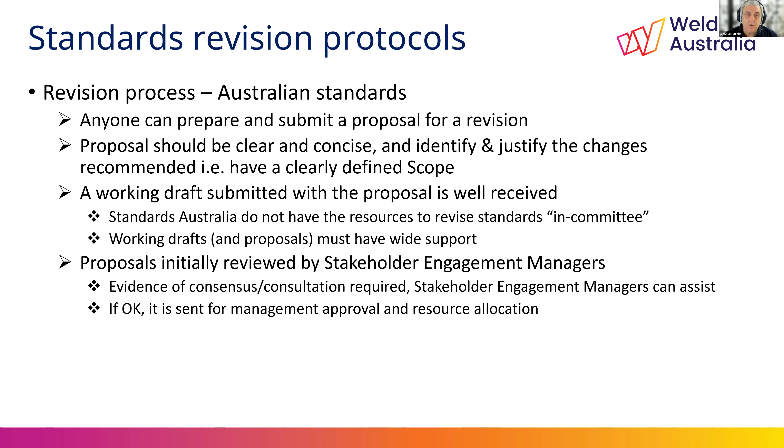Now, proposals lacking support or with minimal detail on changes required will either be rejected or returned to the proposer to seek wider consultation and review. Now, once a proposal is accepted by Standards Australia, a kick-off meeting must be held, usually within 6 months.

And the committee typically has around 8 to 9 months to complete the initial drafting process in preparation for the submission of the draft to Standards Australia editors for preparation for public comment. Now, for this reason, well-prepared working drafts are favourably received during the project proposal stage. Back in the old days, the chair of the committee would ask members what changes they wanted to see in a standard and proceed from there to redraft the text. Very slow and ineffective use of everybody's time.

As I've said previously, Standards Australia just don't have the resources nor the time to revise standards in committee, and it's very, very inefficient. By way of comparison, revising a standard in committee, as was the traditional process, typically took 2 years just to prepare the initial draft. And one standard actually took 10 years to revise. So it has been made abundantly clear that such long time frames are an aberration of the past and cannot be tolerated. If a revision is not completed in a timely manner, it runs the risk of being cancelled.

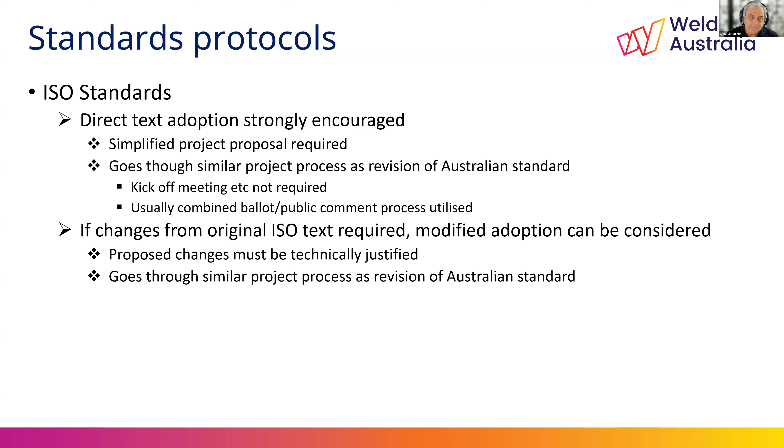Now, the ISO protocols and methodology are similar to those of Standards Australia, except that ISO can give a drafting committee up to 3 years to complete a project. This said, should the ISO drafting committee run out of time to complete a project, the committee can cancel the project and raise a new work item to resume the drafting process. Resetting the ISO drafting clock is important for complex projects. For example, the revision of the current ISO 9606 to combine all 5 parts.

A key point that must be mentioned is that as it is the Australian federal government's policy to adopt ISO standards where technically feasible, it is imperative that Australian committees review and, where appropriate, comment on the relevant ISO drafts. Our mirror committees do have access to all the relevant drafts, and I cannot underscore enough the importance of reviewing all draft standards, including ISO drafts. Too many countries just vote positive without reviewing the contents.

If it's important to Australia, it is also imperative to physically attend ISO meetings so that Australia's views can be considered. Whilst ISO have had teleconferencing facilities available for some years, in practice until COVID hit everybody, it was often difficult to access. ISO meetings now occur regularly via Zoom, but are typically limited to 3 or 4 hours duration and start at 1 p.m. CET in Europe. This usually corresponds with 9 p.m. Sydney time during our winter, or 11 p.m. during our daylight savings time, and 7 a.m. on the east coast of the USA.

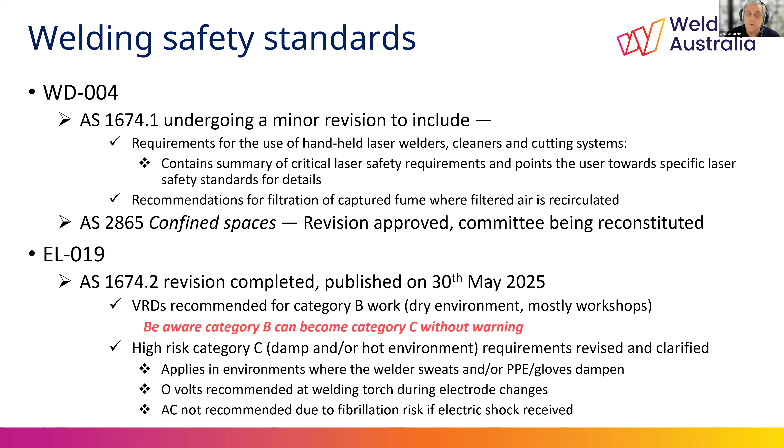Now, there's been a lot of recent activity by the various safety committees responsible for personal protective equipment, and I'll spend a little bit of time going through this. Now, Committee SF6 are currently moving to replace the AS 1338 series with modified adoptions of the ISO 16321 series. These standards cover welders' eye filters and protective visors. Note that the adoption of these ISO provisions has been long envisaged by the drafting committee, and the revised drafts have been balloted by this drafting committee and are now being prepared for publication. I don't have a date.

SF53 covers personal protective equipment not covered by other committees, including welders' protective clothing. Now, AS/NZS ISO 11611 was published in March last year and specifies requirements for the fire resistance and electrical resistivity of the clothing. And the latest edition now includes ultraviolet protection for the wearer for both light duty and heavier duty welding and related applications. Now, the last committee I'm going to just talk about is SF10.

They have adopted a range of ISO standards to replace our AS/NZS 1715 and 1716 standards. The existing Australian standards will remain in use until 2030, and in the meantime, the adopted ISO standards will gradually be implemented as these standards are phased out. Now, Standards Australia ran a webinar covering this change last year on the 2nd of May 2025. Now, I'm going to deviate from this presentation slightly, and in the next 2 slides, we'll give you, hopefully in layman's terms, a quick overview of how the changes relating to weld fume protection with the impending superseding of the 1716 in particular will apply.

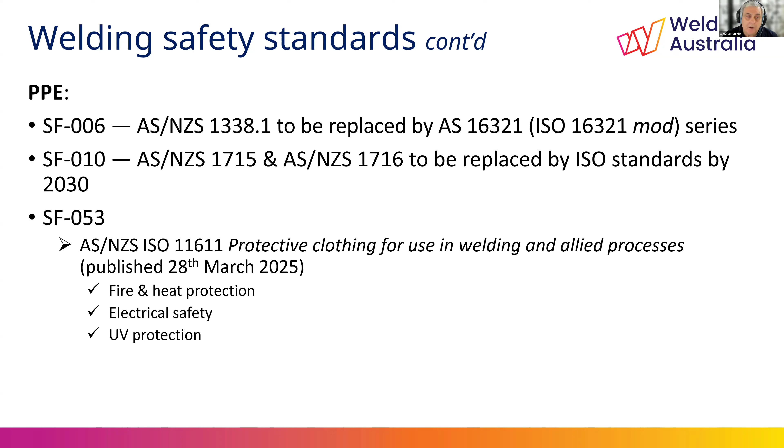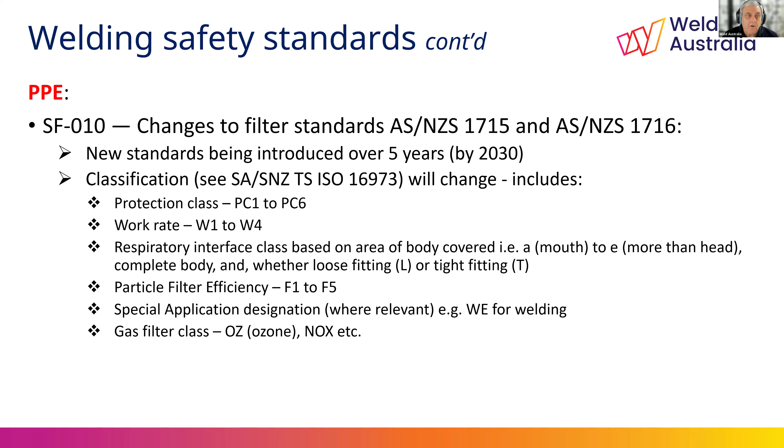Now, the Standards Committee advised that the aged standards are being progressively superseded by a range of standards over the period 2025 to 2030. Now, these standards are all ISO based and cover the same ground that the existing aged Australian standards covered, but they're all updated. Of importance to users, the classification of filters that are available will expand to include the 6 factors shown on this slide. Now, users should note that the standards require manufacturers to test the actual performance of each type of system they sell. This is where things have changed. Unfortunately, whilst there's only 2 testing laboratories able to conduct these tests, it will be some time before users will see product compliant with these new standards being released to market. Now, I'll give you an example of how the process works.

Now, looking at the common P2 filter, which I'm sure everybody is familiar with, it's used by welders, and it's now similar to protection that's provided by what's called the F2 class. Now, for those of you who aren't familiar with this particular P2 filter, it's the same filter that was recommended during the COVID period. Now, an example designation suitable for welding would be a bit of gobbledygook for you: PC2,

W1, bT, F2, WE. Now, if the filter is capable of filtering ozone, it will also include the designation OZ1, as I have shown. Now, you can see how under each of these particular items they apply. Protection class is PC2. That relates to how much potential leakage there may be in the device. There's work rates between 1 and 4. Now, a face mask will probably only be a W1, which is moderate or light work, where you're not breathing

heavily. Then you've got your respiratory interface, so T for tight fitting. A is mouth, B covers your mouth and nose, and it goes all the way up to E, which includes a full body suit. Particle filtration efficiency, F2, which is better than 95%. F3, from the P3 from memory, is 99.7%, and it goes right up into the HEPA range, the F classes. And for application, specifically for welding, it's a WE, and as I mentioned, for ozone, it's OZ1, and it's relevant to the work rate in that particular situation.

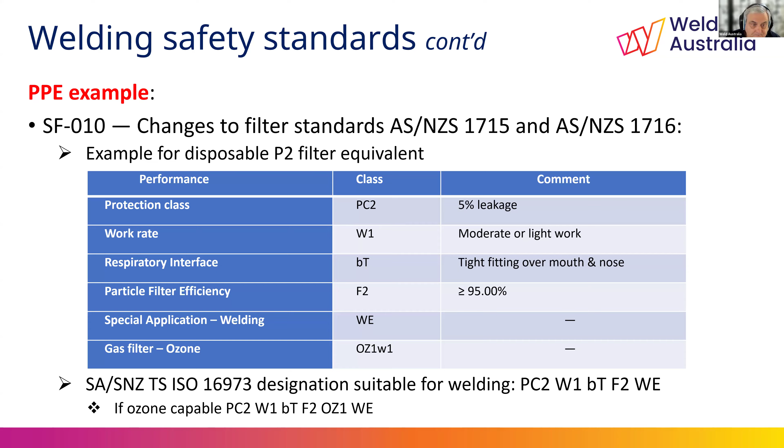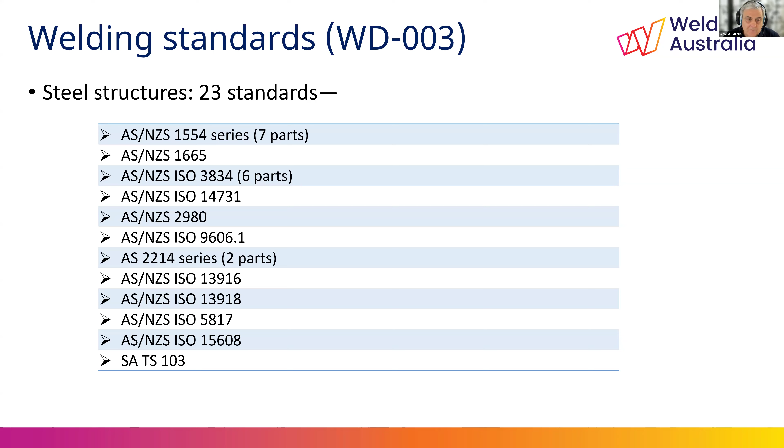Now, looking at some of the other welding standards. These are the main standards WD3 is responsible for. You will note that many of these have an ISO basis, although it is not always immediately obvious that an AS standard has its origin in an ISO document. Where relevant, affected standards will usually indicate that they have taken recognition of the relevant ISO standard or standards in the preface.

Now that the definition of welding inspectors has been resolved, and that was a big hold-up for the 1554 series, the actual revision of this series is scheduled to commence once the revision of AS 1665 gets to the public review stage. This said, I can advise that the revision process for AS/NZS 1665 is well advanced and the initial drafting is scheduled for completion by the fourth quarter of this year. Under consideration is provision to address the inclusion of laser welding and additive manufacturing in 1665.

Now, with AS 2214, you will note that the standard has been retitled and split into two parts at this point in time, with other parts to follow. This change provides for better integration with AS/NZS 5131 and defines recommended technical knowledge and competencies for relevant supervisors and now inspectors. Part 1 of 2214 aligns with the 1796 certificates 10 and 11, and from a structural perspective, Part 2 is specific to bolting. Both parts were published in December 2024.

Whilst Weld Australia has received inquiries regarding training to Part 2, we are referring inquiries to the Australian Steel Institute, who have developed a training course. The drafting of bolting theory components of the course has been completed and a practical jig is actually being manufactured by the ASI. A number of specifiers, including Austroads, are moving to mandate qualifications to Part 2 for bolting applications as soon as people do become qualified.

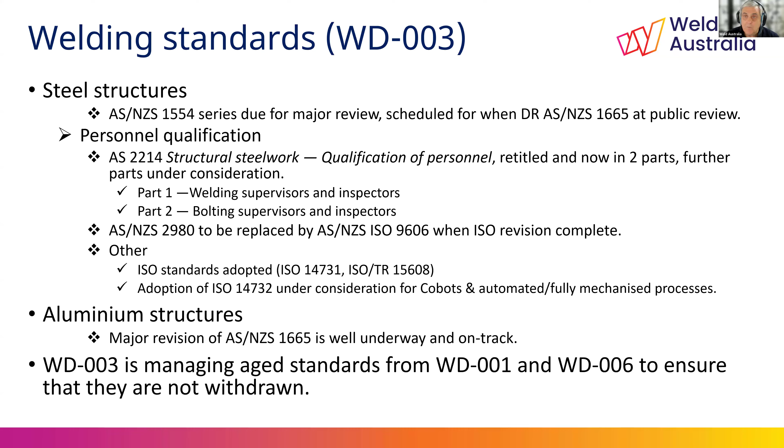So no decision has been made at this stage as far as the New Zealanders are concerned, but the decision will be made in consultation with New Zealand on that point. We may in fact have to. An option may be to run 9606 as a modified adoption to include that in, but I don't know. Okay, thanks, Bruce. All right, moving forward.

Now, back in 2022, Weld Australia identified some issues relating to 1674 Part 1 on fire precautions and linked to this AS 2812, particularly around the definition of hot work and flame brazing. So 2812 was duly revised and republished in June 2024. But just recently, Standards Australia advised that due to a publication error, a number of diagrams in that standard were missing, and this has now been fixed.

Now, regarding AS 1101 Part 3, which is the drawing standard, Standards Australia have been aware for quite a while of some minor errors within that standard. That covers graphical symbols for general engineering, Part 3, welding and non-destructive examination. Unfortunately, due to resource limitations, these errors were unable to be immediately addressed. However, I can report that a project kicked off in 2025 to correct these reported errors and at the same time update non-destructive testing terminology from NDE to NDT, consistent with common usage and also ISO usage.

Now, the public comment process has been completed and comments received are being resolved, and a committee ballot draft is now being prepared, which is the next step in the publication process. So in coming months, I would expect a new edition of that standard to come out.

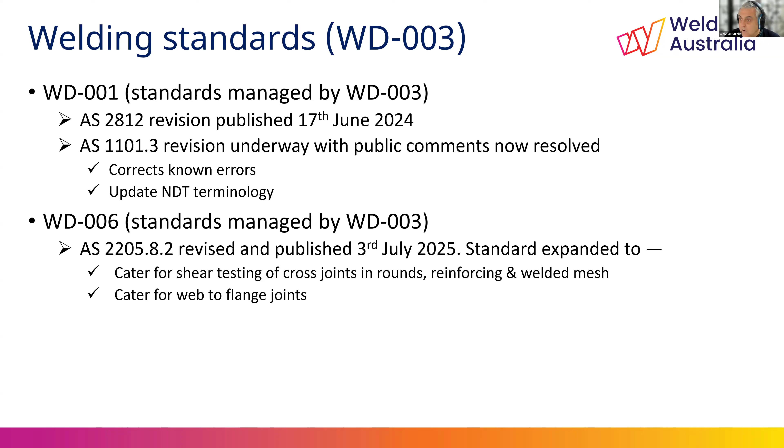Now, just covering the ME1 standards at the moment, which is your pressure equipment. There's currently 25 standards that are active. Now, the standard 3788 covers in-service inspection of pressure equipment. It was revised and published in June 2024, but it has been noted that it does contain some minor errors in the standard, particularly in Table 4.1 and Section 9, requiring an amendment to correct it.

I am also aware that a number of users are asking some very specific questions as to changes in the content of this standard. However, these need to be directed to Standards Australia to ascertain that an error has not been made during the revision process. ME1 are currently revising another standard, AS 4343, which is hazard levels, and AS 3992. Now, public review of both of these standards has been completed and comments received have been resolved, and the drafts are now being prepared for committee ballot.

Now, Weld Australia has also been asked to lead a revision of AS 4458 on manufacturing of pressure equipment, and I can confirm that a working group has held quite a number of meetings over the last 2 years, with the initial drafting process being well advanced. Some issues with material groups have been encountered and identified, and these have been addressed in the revision of AS 3992. Once completed, the draft will be submitted to Standards Australia to be utilised as the basis for a formal revision process, as I've mentioned. So this has actually proved to be a very, very big revision process on this standard.

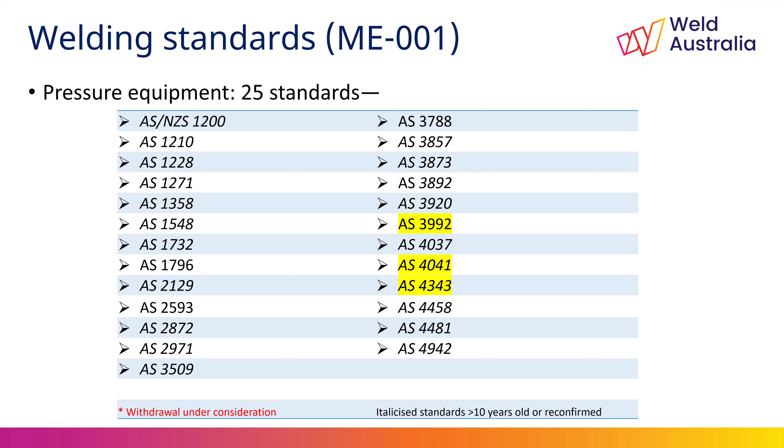Righto. Now, whilst the design standard 4100 underwent a revision in 2020 to remove the fabrication components from the standard and refer to 5131 for all fabrication requirements, it now requires a long awaited major revision. Now, I know that BD1 have been talking about wanting to do this for many, many years. And I've been to many a presentation given by the chair of that committee on this.

Now, the major revision of 4100 is now well underway. And as I'm speaking, the draft is currently open for public comment. So if you go onto the Standards Australia website and go to the public comment portal, you will be able to access it and review the changes. This has actually been a major revision over nearly 2 years, led by 5 expert teams, with the standard being updated to align with current best practice. Of note to fabricators and design engineers, the lamellar tearing provisions within have been revised to clarify some requirements that were seen as too conservative and overly restrictive.

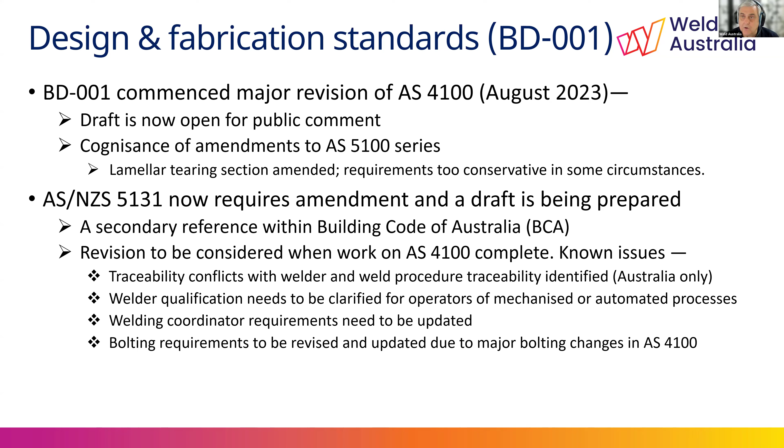While similar to those now published within AS/NZS 5100 Part 6, they have intentionally taken a more informative approach within 4100. Now, associated with the revision of 4100, as I've indicated before, the need to revise 5131 has been flagged, and preparation of a revision project submission is currently underway. That revision will probably be led by Dr. Peter Key from ASI.

Hi, Bruce. So we have another question. Can an ISO 9712 Level 2 person certify the AS NDT standard examination? You probably got me on that point. I really don't know. I take it Level 2s can sign off reports, as can Level 3s, and Level 2s and Level 3s can supervise a Level 1.

We are including some clarification on some of these points within 1665 based on wording that came from MT007 and agreed with the Standards Australia editors. We had to be very careful how we worded that. I hope that it's probably not the answer you're seeking, but it's as best I can answer on that point. Thank you.

And one more. Is it intended that the traceability requirements of AS/NZS 5131 be better explained in the next revision? You betcha. They're a dog's breakfast at the moment, not intentionally, but yes, that is definitely on the hit list.

Thank you. Now, these are the standards on the current screen that MT007, which looks after non-destructive testing, is responsible for or has an interest in. Now in quite a few of these cases, the adoption of ISO standards to replace some of the aged NDT standards has occurred. There are some ISO standards listed that have not been adopted, and they may be considered in the near future.

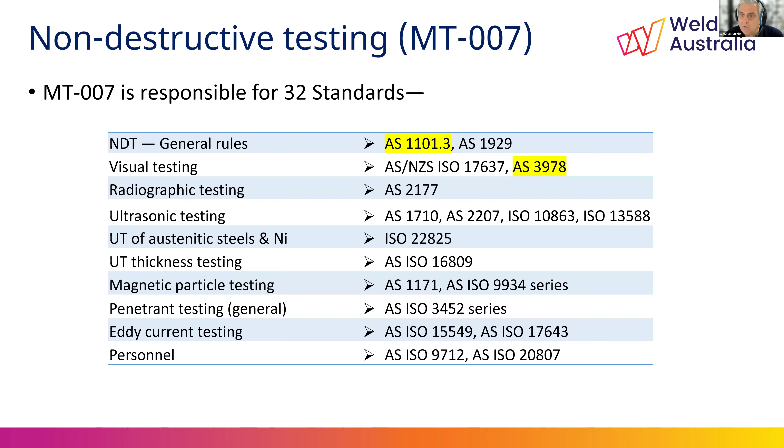To adopt the ISO weld testing standard, which is ISO 4136, a modified adoption of the ISO standard is likely to be required. And as mentioned previously, the shear testing standard was revised to cater for shear testing of bars and welded fabric, and it was published on the 3rd of July last year. Now, that particular standard, 2205 Part 8.2, does include some components from a relevant ISO standard for testing of reinforcing, but we've actually made it broader than just reinforcing.

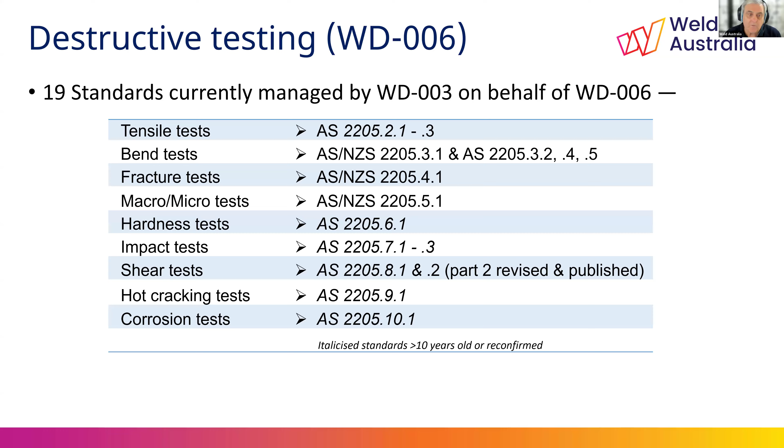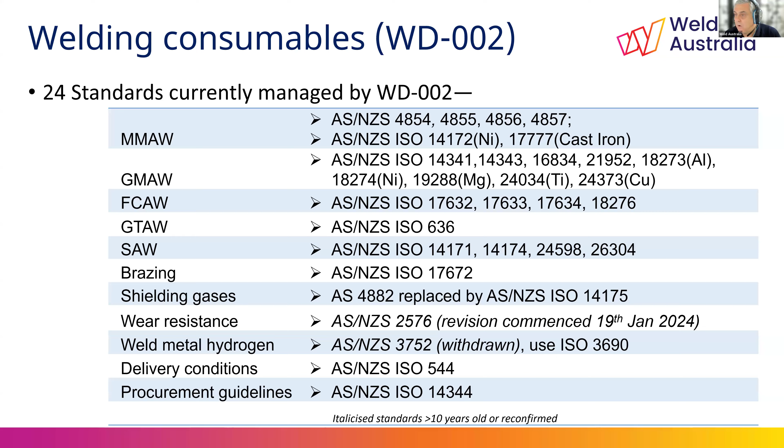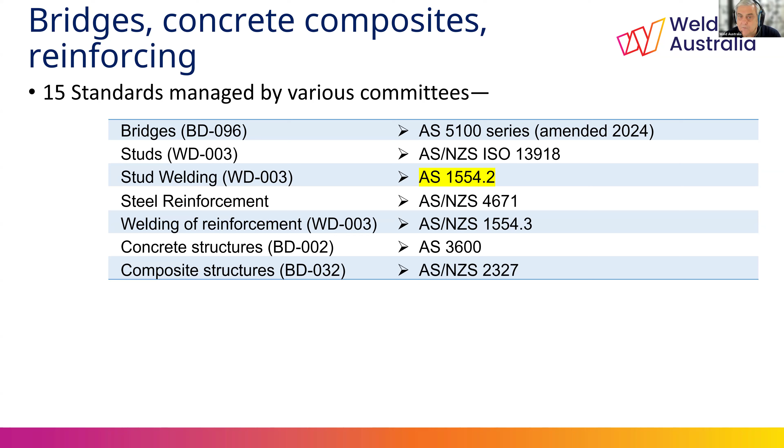Now, AS 4671 now includes reference to two new high-strength reinforcing steel grades, these being 600N and 750N, and at this stage the reinforcing industry has not progressed the need to revise Part 3 of 1554 to consider the welding of these new materials.

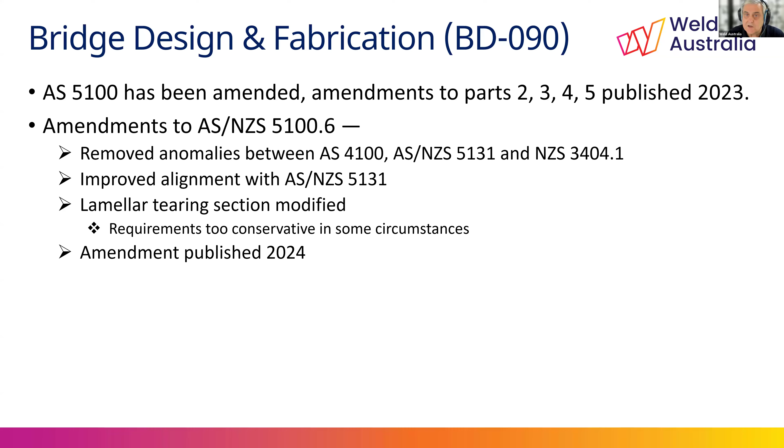The modified provisions are finding their way into other standards, including the current revision of AS 4100, and work to revise and produce a commentary on this standard is now well underway.

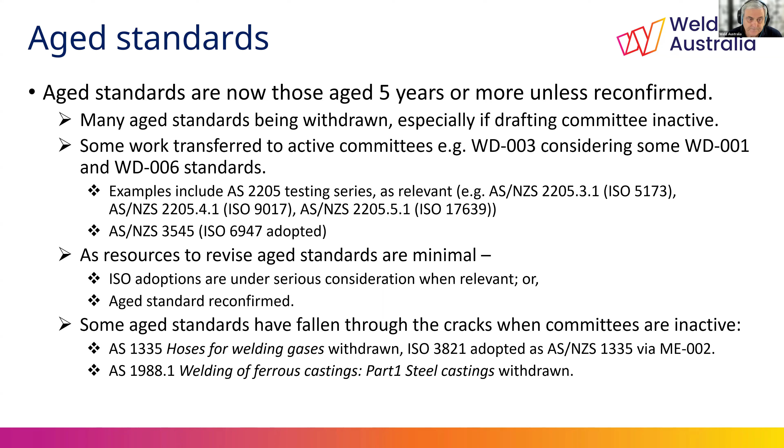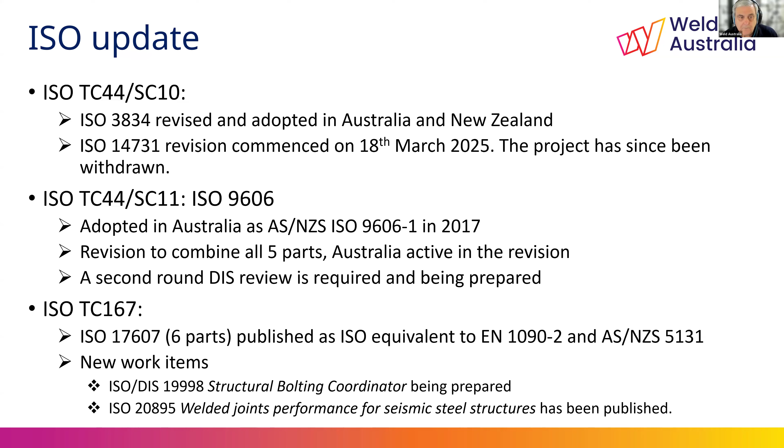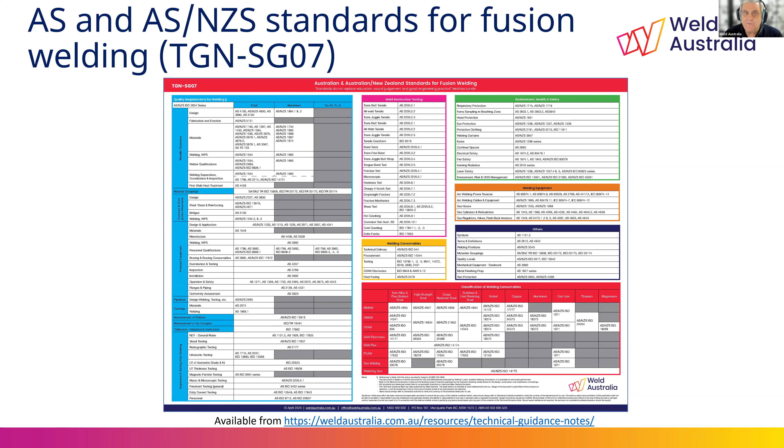And I can say unashamedly that when we drafted the Australian version of this document, we did copy the format, although the content is different.

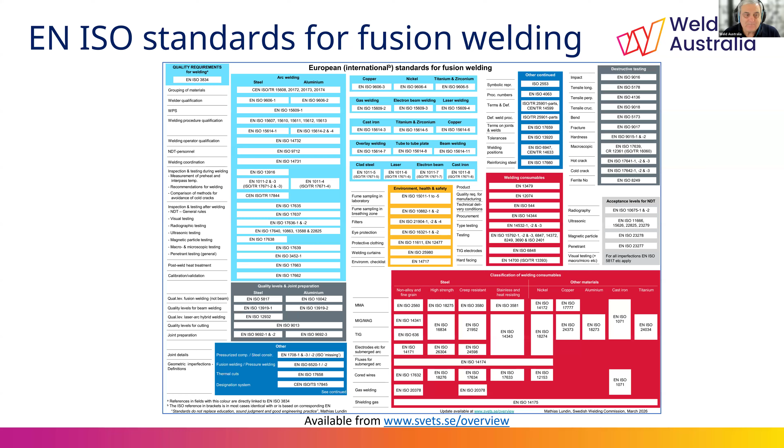Now, just before I finish, I would like to give an overview of standards interpretation requests, because these do come in from time to time and they do cause grief. Before you submit any interpretation request, please read the standard in full. Do not read clauses or paragraphs in isolation. You will simply waste everybody's time, including your own.

Now, you need to submit your question in writing, but there are 3 very specific requirements to adhere to. Firstly, clearly state the identity of the standard, the edition, and if any amendments are applicable to the question. Secondly, state your question very clearly and concisely, giving a very brief description of the scenario and identify the specific clauses, tables, and requirements. Thirdly, prepare your proposed response in a way that the committee can give either a yes or no answer. If the standard is silent, the committee will respond accordingly.

An interpretation can only clarify the intent of the standard. It cannot change what is written. Now, requests for ISO interpretations are managed by the relevant Australian National Mirror Committee. If the local committee cannot resolve the question, then they in turn will submit the question to ISO for a formal response. Users who send their interpretation request directly to ISO will either be ignored, or in some cases they will very kindly refer the inquirer back to their National Mirror Committee.

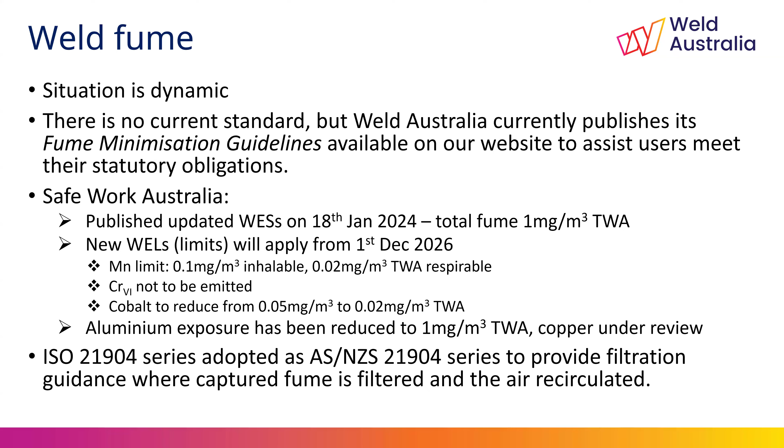Now, just another slide on this. Despite all the doom and gloom relating to weld fume, there are options available for users of welding processes to help themselves. In some European countries, there's a requirement for consumable manufacturers to produce what's called fume data sheets based on 90% of the maximum recommended welding current. They are not universally required as far as we are aware, but definitely are required in Germany and some other countries where the fume limits are similar to Australia.

The driver for these documents appears to be an EU roadmap to carcinogens. These data sheets are particularly helpful when conducting a risk assessment. Now, it is recommended that Australian users ask their suppliers for copies of these data sheets. If the consumable is sourced from Europe, the sheets will most likely be available. If they're sourced from elsewhere, they may not be. But if you don't ask, you won't get.

Now, real-time fume monitors, which I have spoken about in the past, are readily available, and they are particularly useful for estimating the fume exposure for people working near welding operations, but they are not a substitute for formal air monitoring assessment by an occupational hygienist. In all cases, start by conducting a risk assessment, and the hazards to health and safety must be identified and controlled. The regulations, though, do not tell you how this must be done.

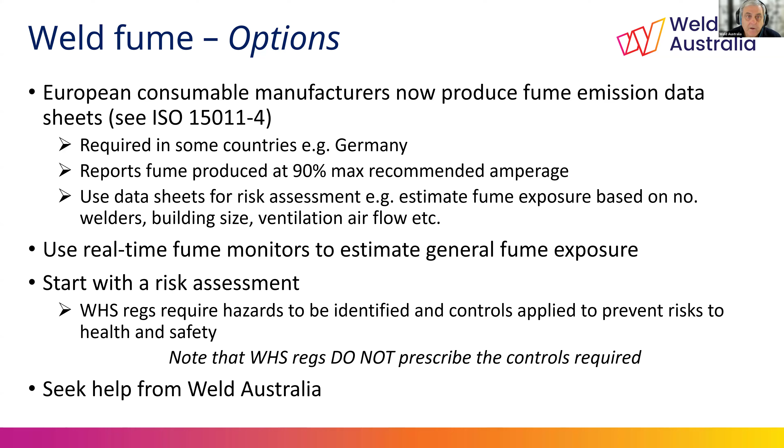As you can expect, there is no one-size-fits-all approach to weld fume control, and each work site and relevant control options should be individually assessed. Now, Weld Australia's engineers can help with this process. Just briefly, Weld Australia does offer fabricators a number of options to help them identify appropriate controls to minimise their emissions of weld fume.

Some key points to remember are that there is no one size fits all in regard to fume control. Every fabrication shop is unique to the type of work and layout, and regulators promote fume capture by a variety of methods, but not all methods are equal. On-gun extraction should be considered given the improved technologies currently available, but may not be suitable or effective when welding out of position or where access is somewhat limited. Alternative controls need to be considered where the risk assessment is really important.

Secondly, where there is little evidence of serious consideration being given to the use of fume capture, it will raise doubt in the mind of the regulator's inspector should you get a visit, and they will ask for a formal air monitoring assessment by a hygienist to demonstrate that the controls in place protect both the welder and people from

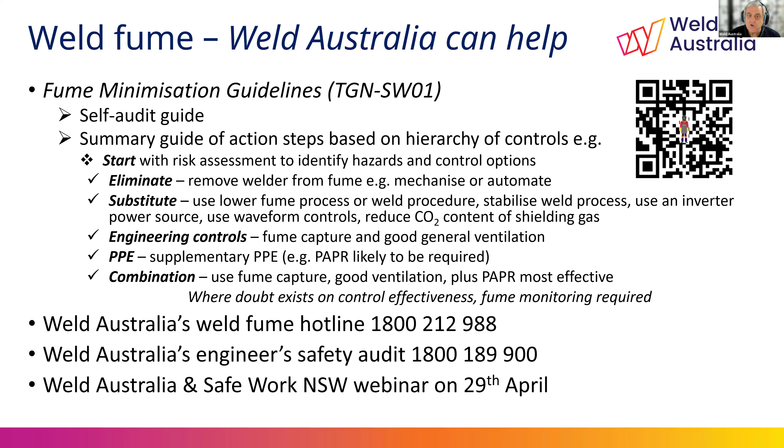All right, Bruce, sorry, we have a question. Certainly. We've got two now.

Okay. With the recent update of AS 1796, Cert 10 and Cert 11 perfectly catered to supervisors and inspectors certification for Australia. Could Weld Australia consider reintroducing the excellent course for CQCWC and introduce a Cert 12 for welding coordinator?

Excellent question. There are certainly Weld Australia people online, and it's a question that can be taken on notice. I know that there is a Cert 12 under consideration, and it could be used as the basis for welding coordinator, but that's under consideration at the moment, and there's nothing concrete in progress yet. Okay, thank you. Next question.

We have EN, ISO, IS, and ASME standards for welding qualification. If we have to qualify WPS, PQR, WPQ as per Australia New Zealand standards, can we harmonise AS standard to EN ISO? Please guide us. Okay, if you have to comply with the EN ISO standards, you have to do everything that